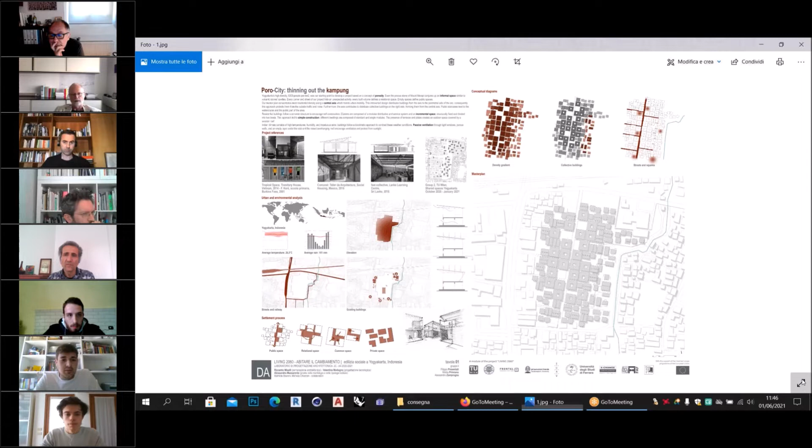So, at first, thinking about our project, we analyzed the city and we found out information about Yogyakarta's high density. That is 9,200 people per square kilometer. That was our starting point to develop a concept and then a project based on an idea of porosity.

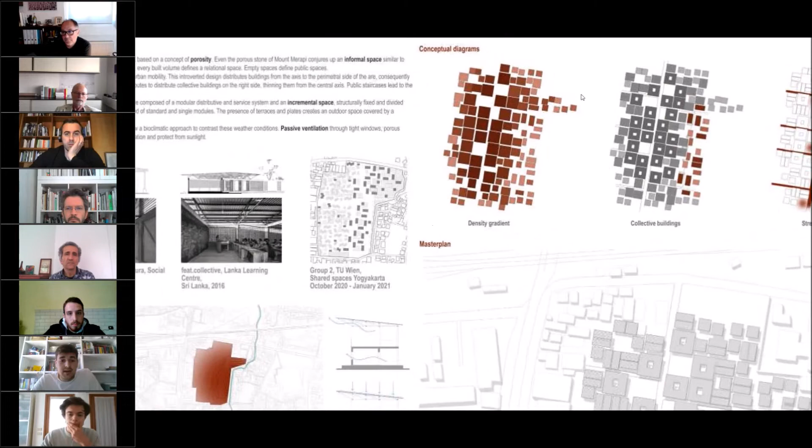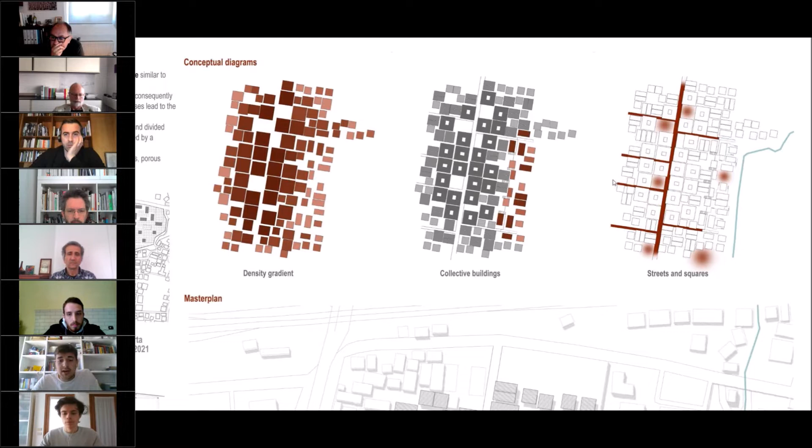Even the porous stone of Mount Merapi conjures up an informal space similar to volcanic stones' cavities. In our organic distribution of buildings and spaces, every corner and every street hide an unexpected activity, and every built volume defines a relational space. And also empty spaces define important public and relational spaces designed for Kampung inhabitants and Yogyakarta citizens.

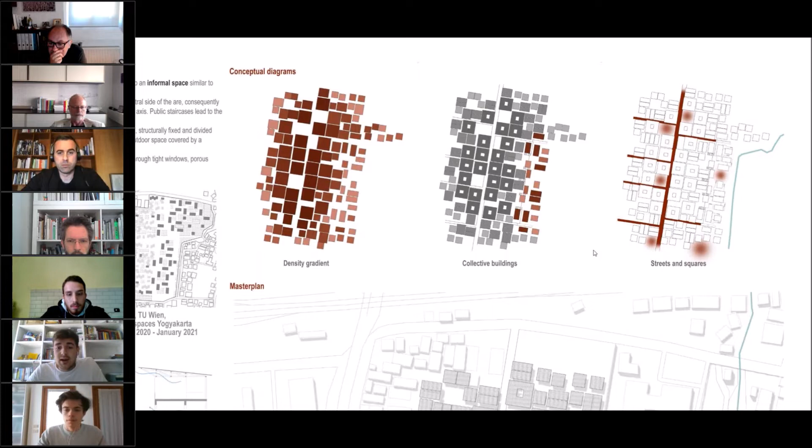Our starting point for the development of the master plan is a central axis that is wider and longer than other streets, where most residential density is concentrated. This axis also means urban mobility and gives the master plan a relation with the cities around it. This introverted design distributes buildings from the axis to the perimetral side of the area, and consequently this approach protects them from the outside traffic and noise.

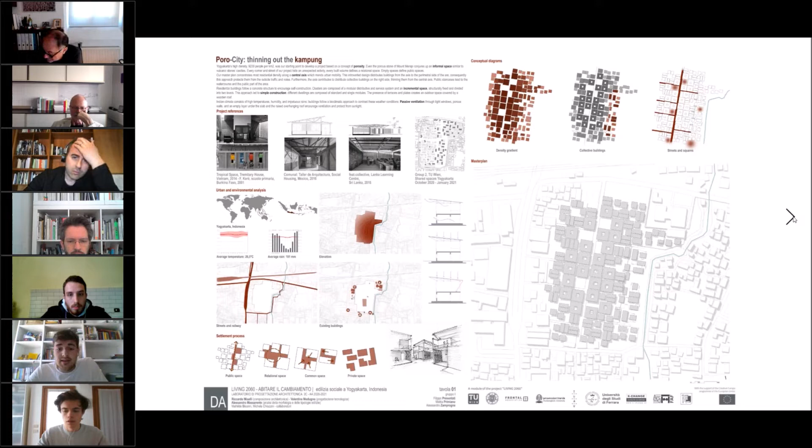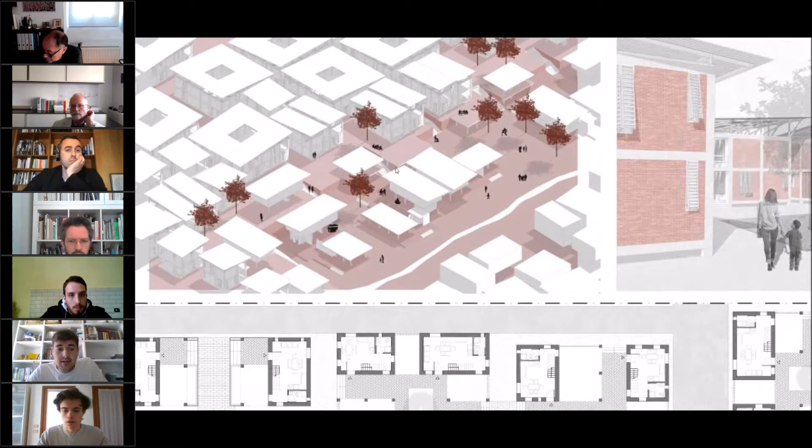Furthermore, the axis contributes to distribute collective buildings on the right side, thinning them from the central axis. In this way, public activities are only partially related to residential ones, and social life is concentrated in squares along the axis and along the waterfront. On the right side, the public staircase, which solves a difference in height created to give a planar and comfortable riverside, leads to the watercourse and to the main public part of the area.

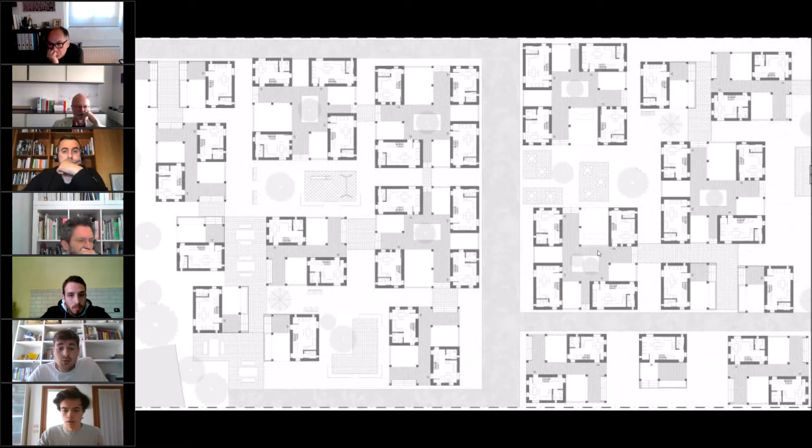In the ground floor plan, that mixture between relational, common, and private space is clear. In fact, people can stay together in picnics, small markets, and playgrounds, which enhance residual space between buildings. Residential buildings follow a concrete structure to encourage simple self-construction. Clusters are then completed with brick and perforated brick walls.

Clusters are composed of singular modules and an incremental space, which is structurally fixed and divided into two levels. The possibility to improve private space is tied to economic growth, but mostly to improve people's lives, who can add a bedroom or a commercial activity or a study for further necessities and aspirations.

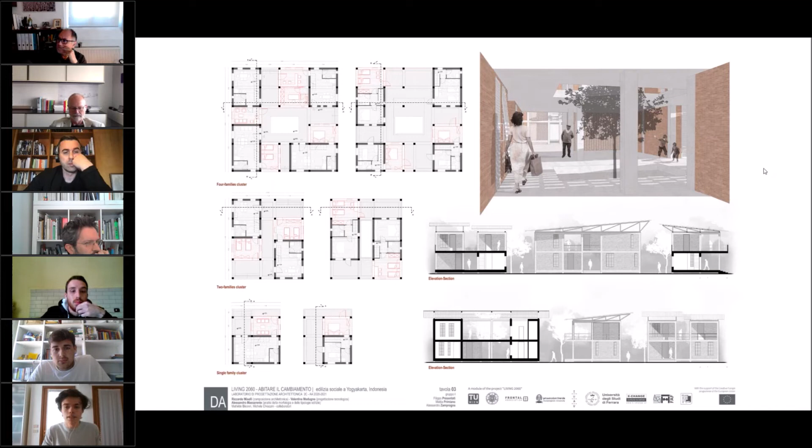The presence of terraces and plates creates an outdoor space covered by a wooden roof. The valorization of the empty outer space develops a sense of community between people living in the same clusters, but also contributes to contrast over-densification in Kampung.

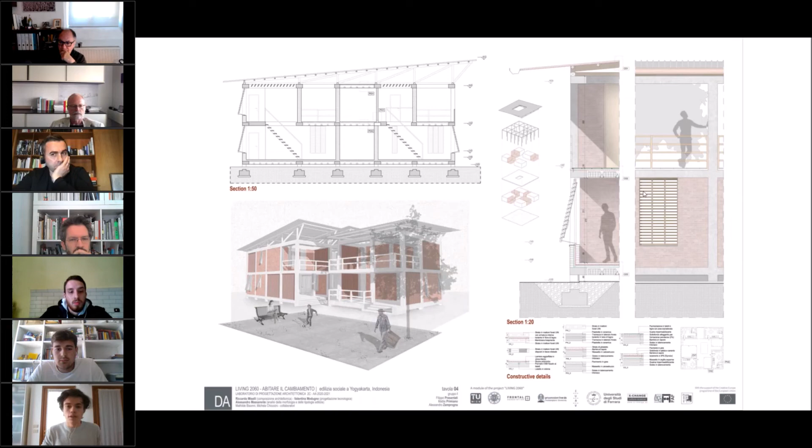The building system is the result of a study on the Indonesian climate, which consists of high temperatures, heavy rains, humidity, and so buildings follow a bioclimatic approach to contrast these weather conditions. Passive ventilation on the distributive system and the protection from sunlight are two features of this consideration of the climate of the area.

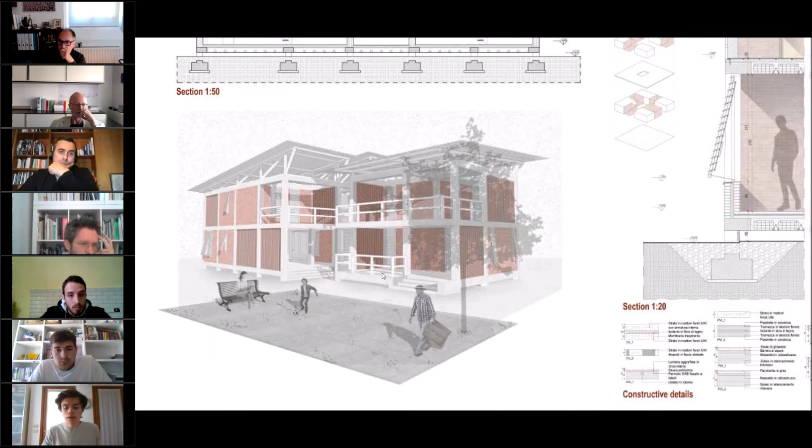Our project is a proposal for a social development focused on living together and sharing spaces in a porous and organic space where everyone can find his own dimension in personal and social life.